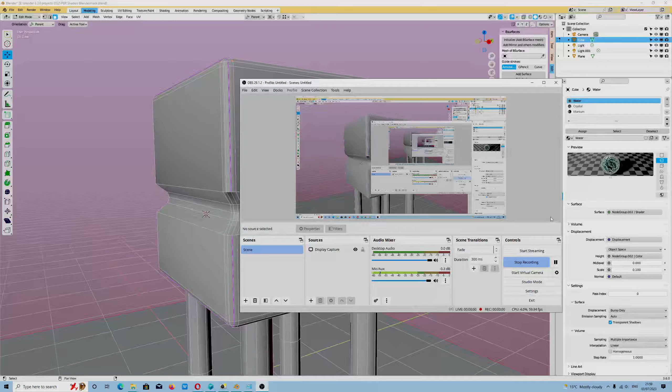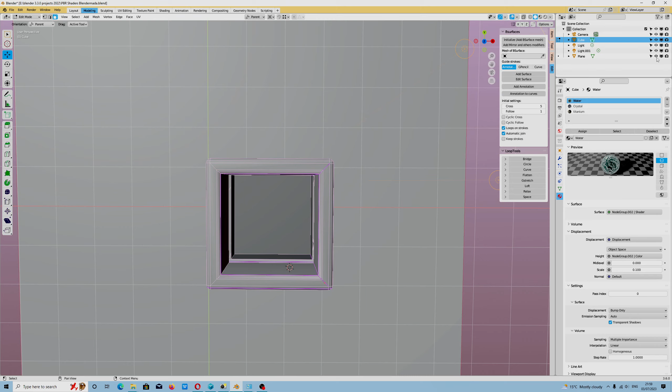Hello people, in this video tutorial I wanted to show you how you can quickly weld polygons. For example, I wanted to show you something because this may speed up the process of how you work with objects. Okay, Z, and I will cut in half a polygon.

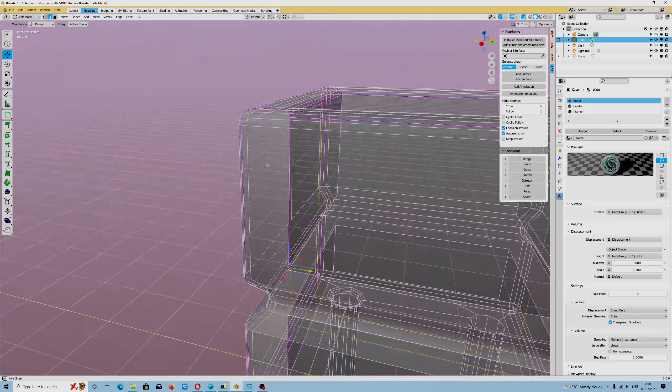I consider it to be important, that is why I want to add this video tutorial. Split mesh, split edges. The reason why I want to show you this is because there is something that you can use to quickly weld your polygons.

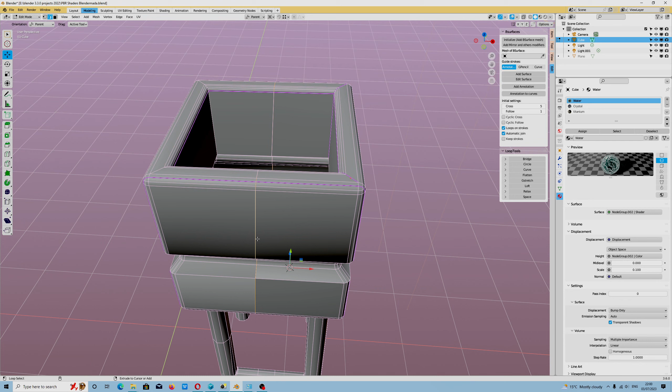Okay, sorry, my fault, I should use a different command because I want to split mesh. Split edges. I have to show you something important that I discovered. That is why I had to use the command split mesh, because I must show you how I will be welding edges together quickly, as quick as possible.

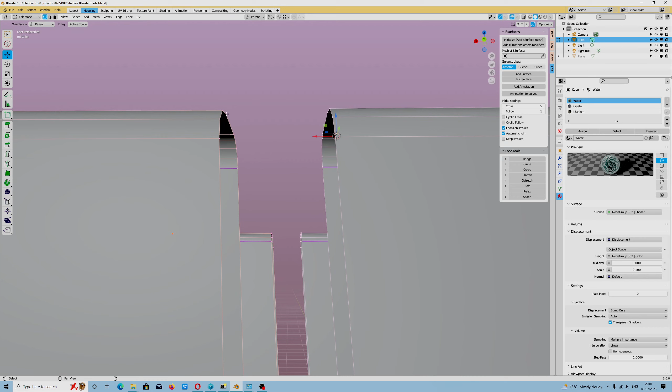There's an option which will allow you to do that: auto merge vertices. You have to select this, and we got threshold. I will decrease the value like this, because if you increase the value, you cannot get too close next to the point, next to the vertex. After that you have to turn on snapping, align rotation to target, rotate. I will not select scale because I don't consider it to be important, and I will choose median point.

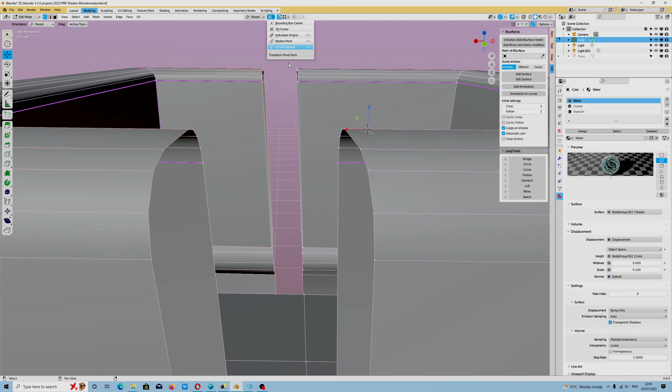After that you select this gray circle and you gently place your mouse cursor. And after that you can deselect this, and you can deselect this to check if the weld works without any problems.

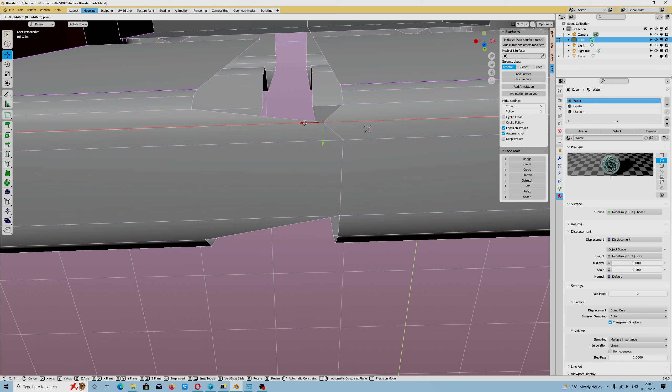You can turn this back on like that. Check what options we are using, and turn this option on as well. And make sure you select that gray circle, then you can move it here.

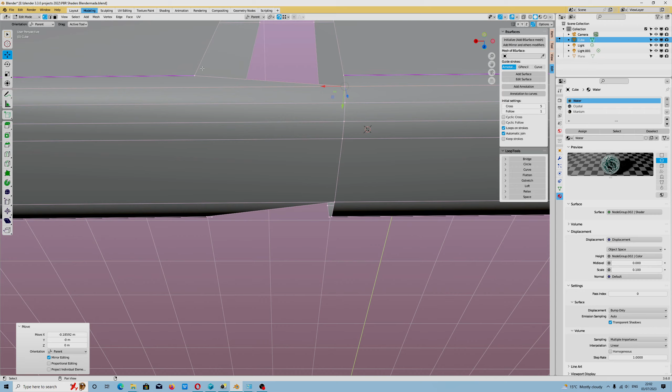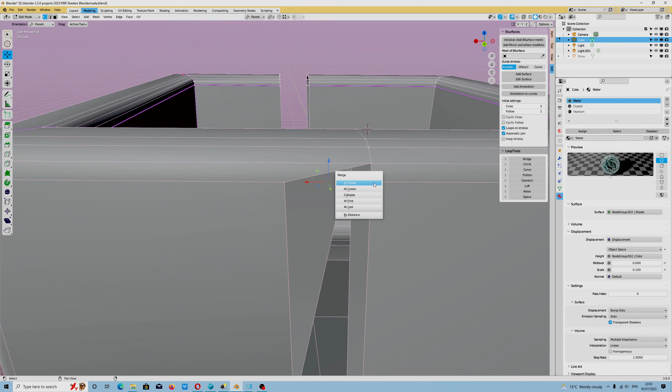And you should see an orange indicator when it welds successfully your vertex, you can see on the right side. I think this is the quickest way, because I consider it to be important, instead of doing it like that and pressing M on my keyboard. This will not save time when you work with complex models.